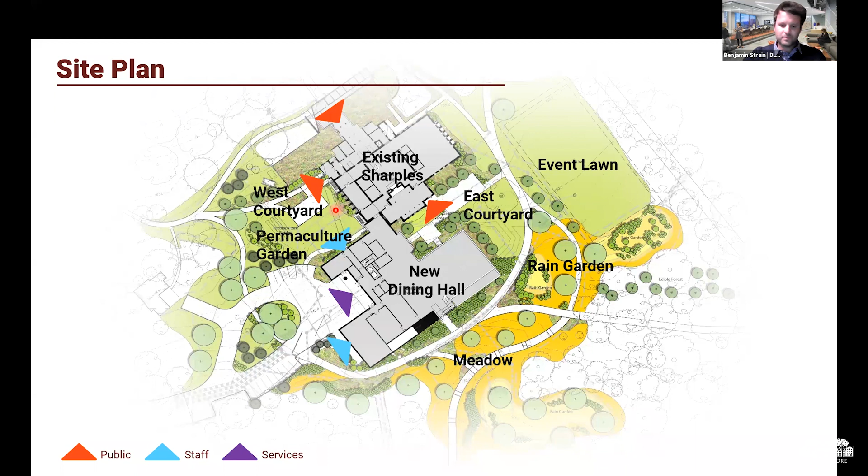So just a quick view from the south, this is the addition, looking back toward the north. Some of the key features: it is a mass timber structure, so very sustainable, a small carbon footprint, as Prem will mention later on. There is a resemblance of campus culture, of stone, of slate tile, and we also see a hint of the photovoltaic solar panels on the roof here. And so again, we're here in the rain gardens, the rich meadows, looking back toward the outdoor dining terrace. So behind the control point, behind the checkpoint for dining, there is outdoor dining now.

And here, again, we're going to populate some current photos of construction every time we share a rendering, so kind of where we are today and where we will be in the future.

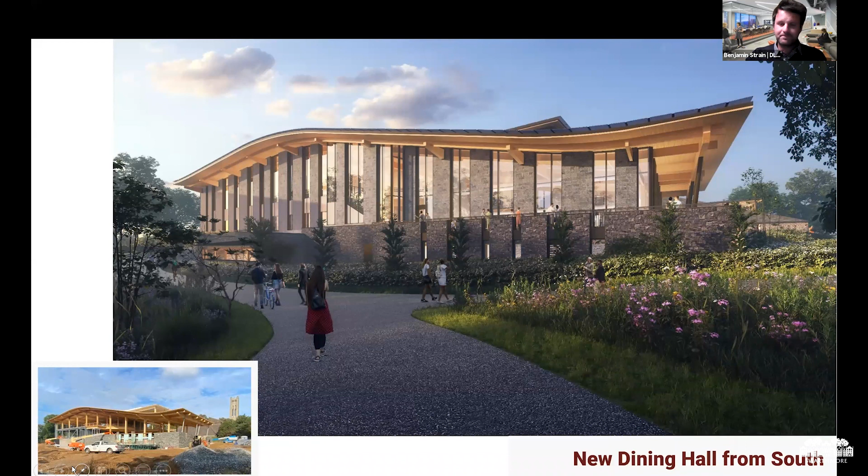Here at the first floor, just helping orientate everyone, in the bottom right corner we have existing Sharples shaded in gray, and the new dining hall here in crimson red. And so again, the kitchen and the dining has all shifted out of, or mostly shifted out of, Sharples that we see here at the top of the screen, and moving into the large, really efficient and beautifully daylit addition here for the dining hall.

Some notable things to move: the Office of Student Engagement is moving from Parrish Hall into what was once the kitchen, and this is a completely reimagined space, new finishes, new opportunities for daylight, really creating that student hub around the student orgs and their lounge space. An additional market cafe really drives success for the student lounge, as well as the rehabilitated fireplace that we see from the historic photo.

Within the dining hall, the new dining hall, there are 10 serving stations or platforms. So it's an all-you-care-to-eat menu, but in more of a retail setting. You can imagine it's not a single line into dining, but past this point you're free to go to the serving station of your choice.

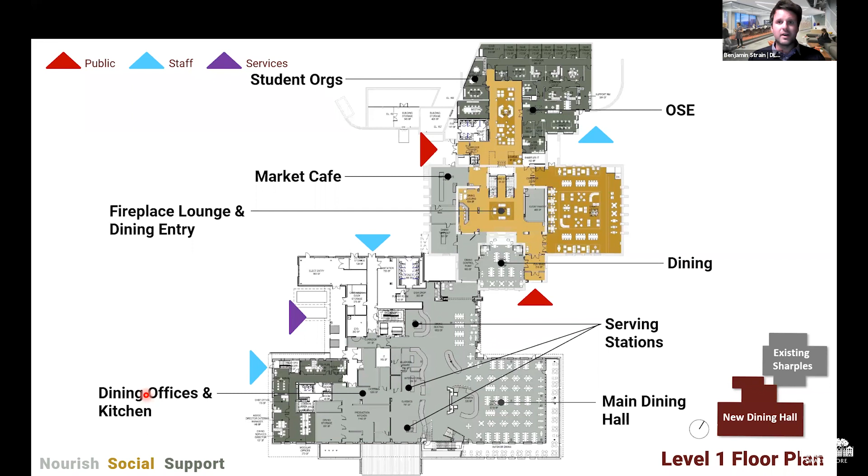You can go to multiple service stations, the salad bar, the grill, the bakery, and really collect what you wish to have for that meal. So it's very interactive. What's wonderful too is the dining staff is out front and center, interacting with the students and visitors to the dining hall. They're no longer tucked behind into the kitchen, but we're really preparing food fresh for everyone at the serving stations. Filling this out, besides the seating and the serving stations, is the reimagined kitchen, getting what was once back of house to front and center, introducing natural daylight and looking at opportunities for natural ventilation for fresh air for the workers.

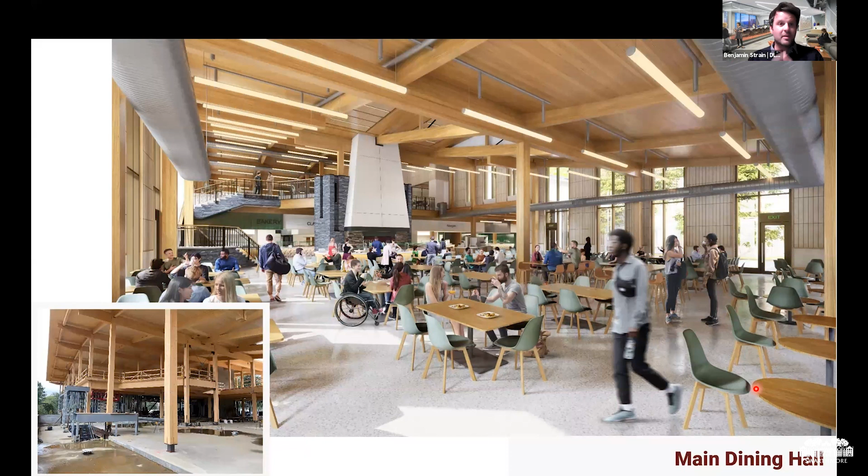Here we're at the corner of the main dining hall, in the southeast corner, looking back toward this large volume of a mass timber structure. It's really a reference to the existing fireplace today, what's known as the hearth. This is the pizza oven, all electric, served here, as well as paninis and other fun interactive stations where the workers are out, the dining staff is there interacting with students, having conversations, really learning more about where their food comes from and how it's prepared.

Again, beautiful daylight, and we'll get into some of the sustainable strategies moving forward. And then bottom left, where we are today in construction, it's really coming alive on campus. I know Susan walks by daily and sends us photos if we're not there, and everyone's just full of smiles. The whole campus is, so it's wonderful to see.

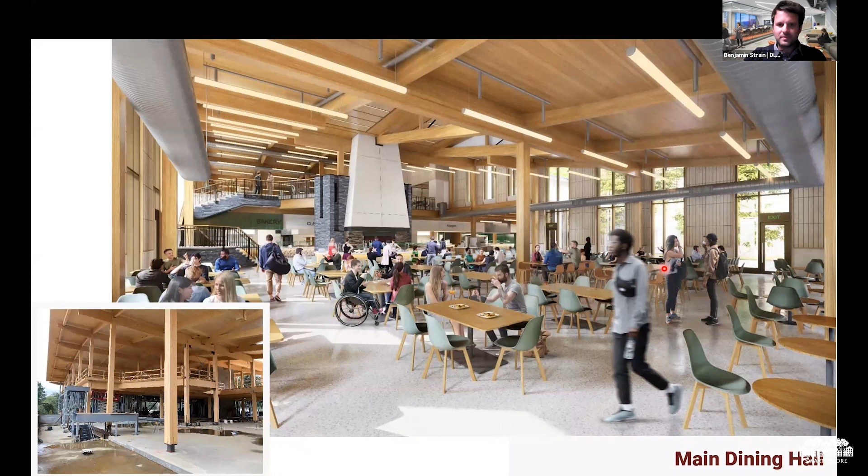And the last here, the Upper Sharples as it is today, again it's been reimagined. We're actually rotating the stair, so it's really a more seamless procession from the north entry that is here today. Instead of the checker stations, you're going to be greeted with the welcome desk. You have opportunities for meeting rooms and more opportunities for student clubs and orgs to meet, really for faculty and staff and students to come together, have that community feel.

And the dining that we see up here today is being converted into a game lounge and then the piano lounge. What's unique about the game lounge is really an opportunity to unplug: backgammon, cards, Dungeons and Dragons, whatever anyone would wish. It was an opportunity for students to say, hey, we're immersed in technology throughout our day, throughout our studies, can we have an opportunity to unplug? So this is a really unique game lounge within the 21st century where we think we want technology, but it's actually an opportunity to unplug, which is really great.

As we saw from the previous rendering, the new dining hall is 2 levels. There is an accessible elevator centrally located, really thinking about how people maneuver through the space, whether at the grand stair or through the elevator. That opens up through what we're calling private dining, but really meeting rooms, so you can come together over lunch and have a student club or a staff meeting, faculty meeting in these private dining rooms. Additional serving stations are upstairs.

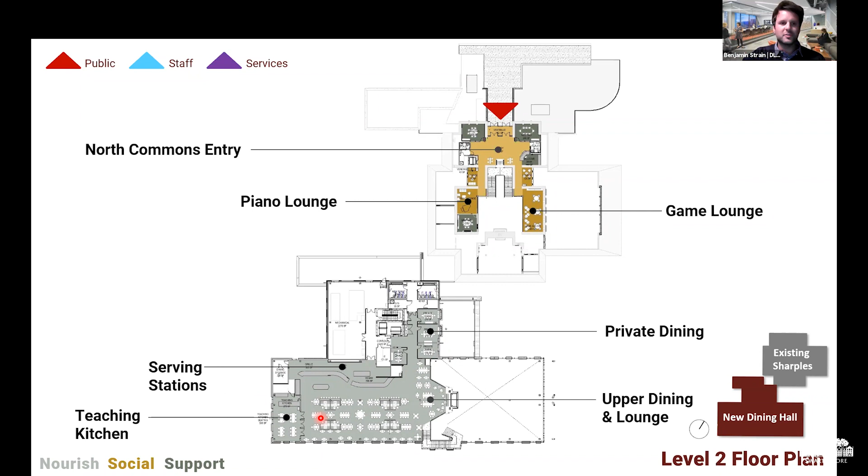We're turning the stair around in the Sharples Lounge. This was once really intended to be a fireplace lounge. Looking back at historic photos, the fireplace is just to our right on the screen. Kling, the original designer of Sharples Hall, really thought about this as a lounge space. So we're reestablishing the lounge, adjacent to the check-in station for dining.

We see in the photos today that we're actually removing the bridge and rotating the stairs. So you come directly from the doors through the Juliet balcony that was once here, then down the stairs into the lounge spaces, into the student clubs, and ultimately into the dining. It's a wonderful space. Renovation starts approximately a year from now, so we'll see some big changes coming soon.

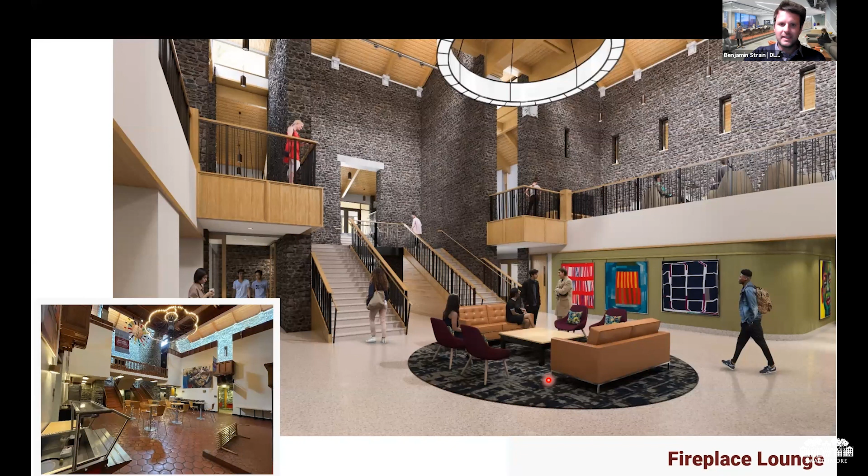With that, Prem, we need to jump into some sustainability, and I'll pick up instruction at the end. Absolutely, thanks Benjamin. Can you hear me okay?

I want to frame this conversation about sustainability, which is really important, as Benjamin mentioned during the visioning sessions, as a core criteria for success. Swarthmore has a very robust environmental framework, and most of you are probably familiar with that. This Dining and Community Commons project exceeded every aspect of the Swarthmore environmental framework and then more.

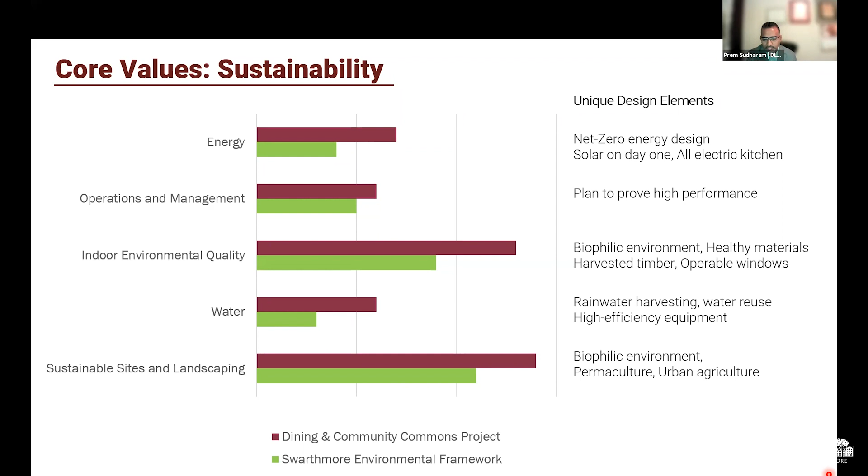I'm going to talk to you about the journey that we went through. As Susan mentioned, we started in 2018. However, the journey will continue for a very long time to get to our final success metrics in terms of sustainability, all the way through 2025. I'll walk you through briefly the engagement sessions that we had in the beginning that led us to where we are today in construction.

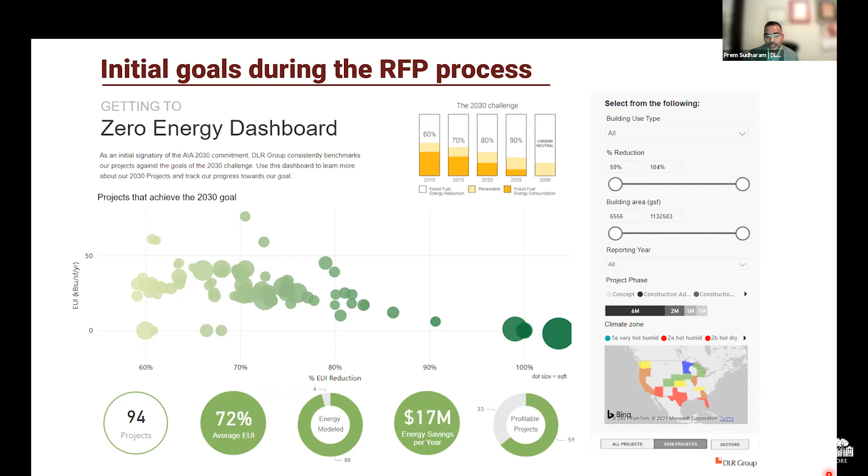In the initial RFP process, when Swarthmore College was looking for an architecture firm to design this facility, they had a requirement that this building should be a zero net energy building. This is above and beyond what the Swarthmore Environmental Framework has already put in place. So we demonstrated our experience as DLR Group designing net zero energy buildings.

We had three questions that we wanted to solve before we began design. The first question was, what does really getting to zero mean to Swarthmore College, and how does that relate to Swarthmore College's values? And finally, how do we measure success? These were fundamental questions that drove our design from the beginning.

At the same time, when we started, we also realized that our college was going through what is called the Road to Zero map, which is a carbon neutral plan that the college is developing to achieve carbon neutrality by 2035. So we wanted to understand how the Dining and Community Commons project plays a role in this key plan that the college is developing towards carbon neutrality. I'll talk about how that comes together.

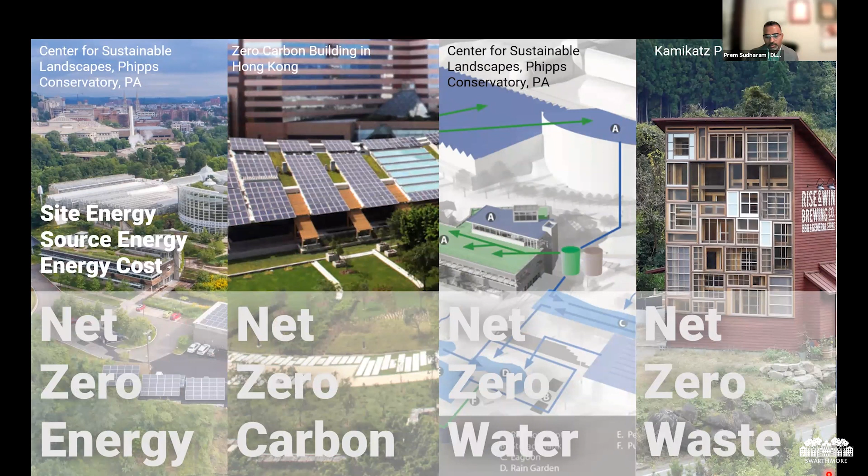One of the first things that we wanted to explore was, what is net zero? There are lots of nuances to this idea and definition of net zero, from energy, and you probably all have heard from the COP26 conversations, carbon is a very important topic. So we discussed what net zero carbon is, but also net zero water and net zero waste. It's important that we discuss all these different nuances so we know exactly what is the goal that we're going after, and also what is the goal that we're not going after.

We also talked about the context of what is net zero. When you take carbon footprint, we can go all the way from construction to operations, to the materials that are used in construction, as well as transportation and so on, all the way down to the food that's served on campus, what carbon footprint does that have? So we explored all these different options to really understand what it is that we are going after.

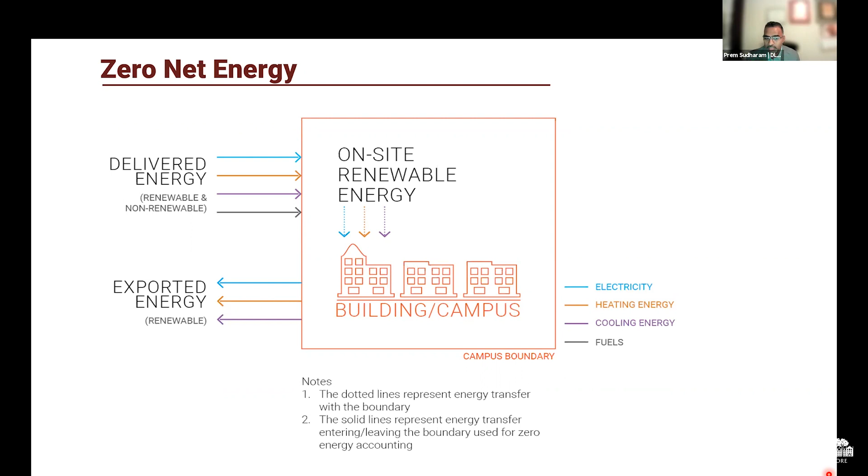At this point, I want to clarify the term zero net energy. Imagine drawing a boundary around this building, and think of the amount of energy that is being generated on this facility over the course of a year. If the building operates within that budget of the amount of energy that is generated on the facility, then that building will be considered a zero net energy building. This was our criteria going into design.

We also wanted to explore, as some of you mentioned, the quality of the food served in the dining facility. We wanted to truly understand, how does dining relate to sustainability? How does food relate to sustainability and wellness?

So this was one of the exercises in the engagement sessions we had, where we asked dining staff, students and faculty how they see the connections between ingredients and the people who serve food, the people who are receiving the food at the dining facility, and the building itself, and how that's connected to the campus in terms of bringing awareness towards healthy food, and how this all relates to the regional and global impact of where Swarthmore is. This was one of the most interesting sessions we had, because we discovered so much.

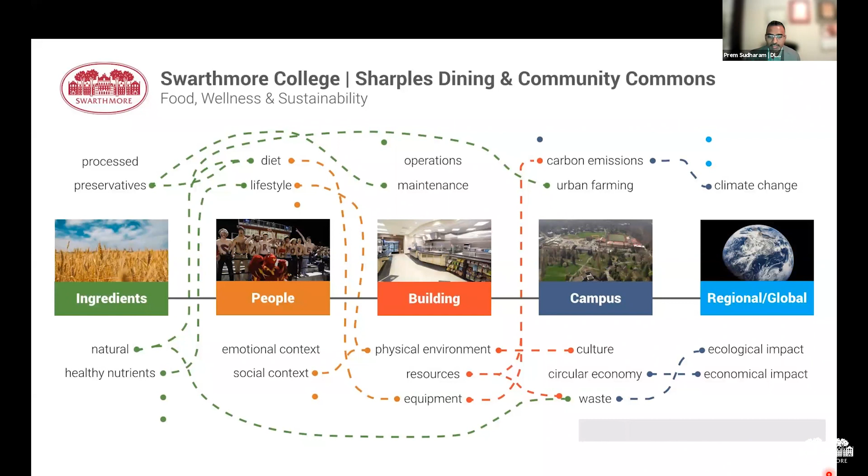This led to amazing goals that we identified very early in the design, before we ever started. I'll highlight a few of them.

From a dining staff standpoint, they were excited about how they can change the culture to one of yes in lieu of we can't. One goal they identified was that currently 45% of produce is locally sourced, and they want to achieve 80% in one year. They also have a goal of a 40% plant-based menu as this progresses, which are amazing design goals that change how and what we procure in terms of equipment for the kitchen facility.

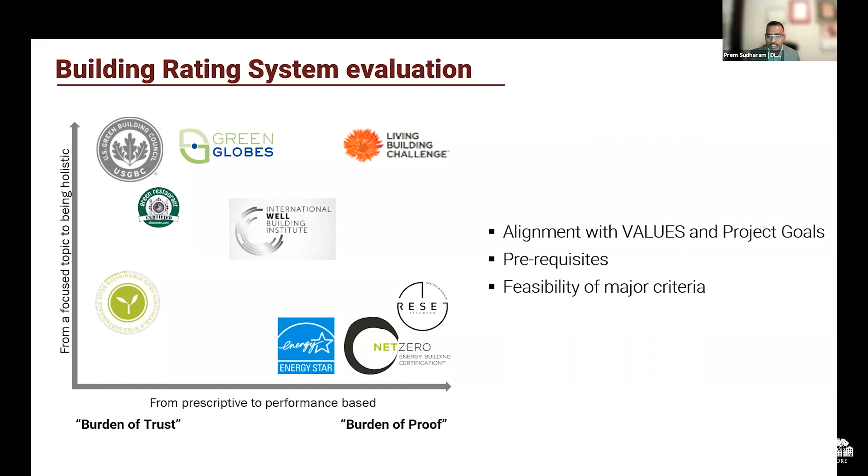Within the Swarthmore environmental framework, there are some gaps. We also identified other green building rating systems with similar gaps, but the only rating system that aligned with Swarthmore's values for this project was the Living Building Challenge. So that became the measure of success.

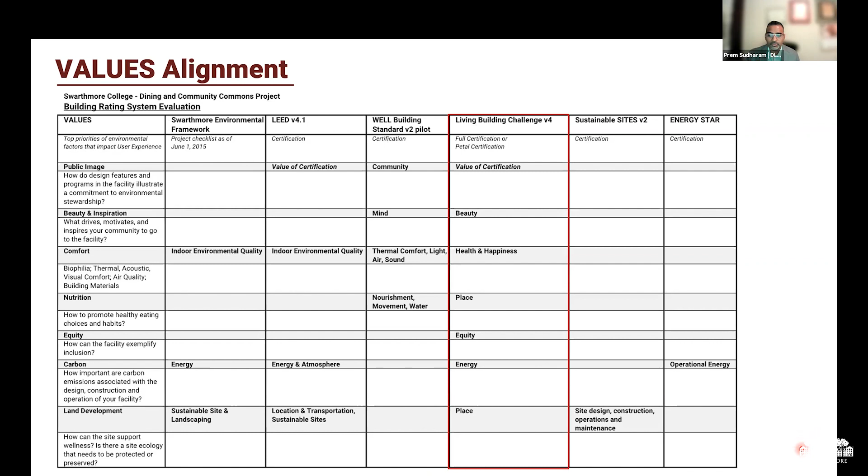So we began to pursue the Living Building Challenge. One key criterion reinforces that this green building rating system is on the burden of proof side of the equation—we have to show in real life that this building performs as a net zero energy building. It's a very challenging green building rating system to achieve.

To give a comparison, there are several hundred thousand LEED buildings in the world, but less than five to six dozen Living Building Challenge projects in the whole world, because it is very difficult to achieve. The Swarthmore community chose to pursue this challenge.

One key aspect of this challenge was to explore biophilia, this idea of love of nature. We're in this beautiful setting in the Arboretum, so we took a whole group of people and explored what it really means to be biophilic, and how the Swarthmore campus can inspire this design.

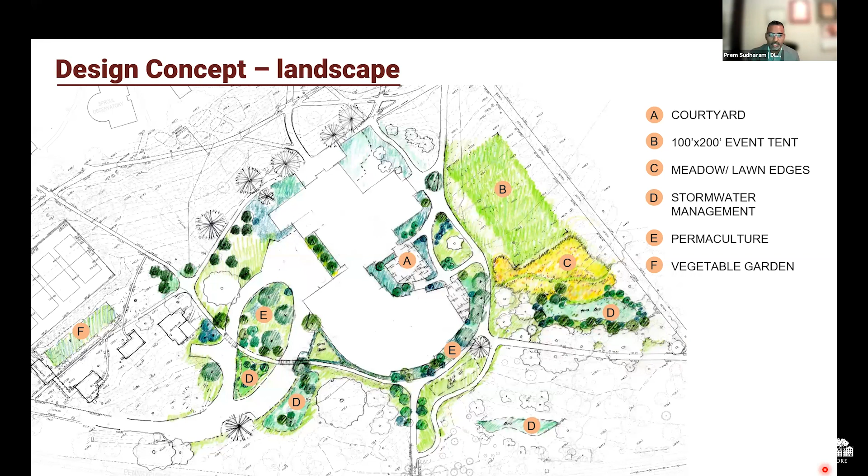There's a vegetable garden, permaculture, which is the growing trend in agriculture. So there will be plenty of opportunities to learn permaculture. And when it's all said and done, over 60% of the landscape palette on this site is either directly edible or used for some kind of purpose for humans, other than being just ornamental. That is an amazing shift from where we started, because of the engagement we had with all of the Swarthmore community.

Specifically to achieving the zero net energy goal—the amount of energy you produce on site should be above or equal to the amount of energy you consume over the course of the year—we developed an approach of top-down and bottom-up, looking at the carrying capacity of the site: can the site carry X amount of building? And then from the bottom, what do we really need? One thing we realized through this approach is we actually right-sized the program, reducing the square footage required to satisfy both community commons and dining needs. That helped tremendously in getting to our zero net energy goal.

One key thing I want to identify here is two things. One is electrification. What we realized was dining facilities are a very energy-intensive building type, and the biggest energy use in a dining facility goes towards the kitchen and its equipment. So to achieve the zero net energy goal and the criteria we set during the early design process, it needed to be an all-electric kitchen.

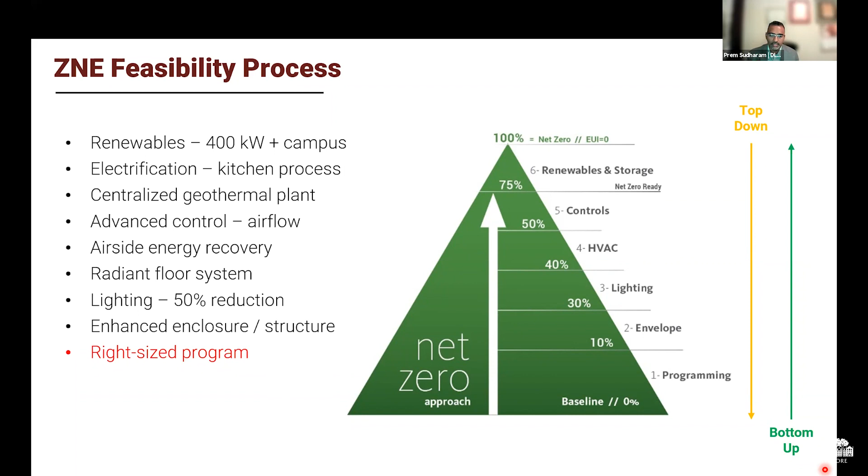The geothermal plant is basically a system that allows us to take the heat from the building and store it underground through a series of pipes. Then when we need that heat back again, we can take it back from the earth. This is a very effective renewable source of energy that doesn't require any fossil fuels to operate. That is another key design aspect that will help us get to zero net energy, and I'll talk more about how this project provides a space for that geothermal plant.

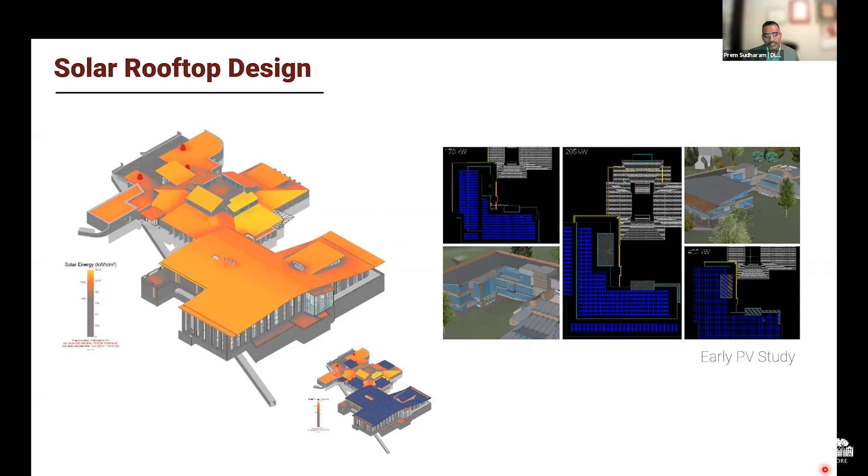As I mentioned, there are a number of energy saving solutions that we have. One that is significant is demand control ventilation and radiant flooring. We also included another key aspect the college has called carbon shadow price, which assigns a certain amount of carbon, or a certain price, per metric ton of carbon. That was influential in deciding what design strategies will get us to zero net energy.

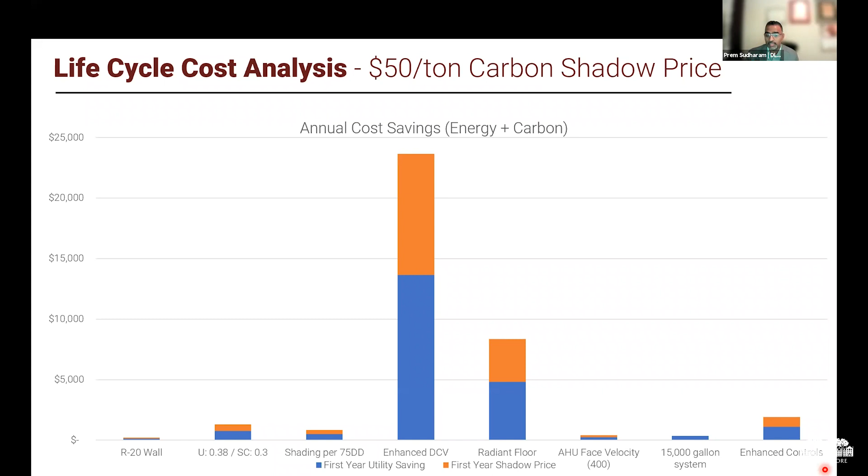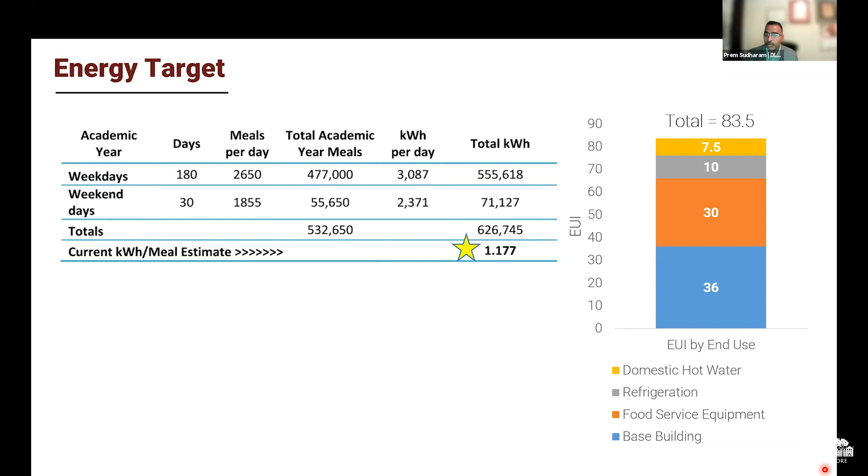So this is where we ended up. The chart on the right shows the amount of energy this building will consume, expressed as energy use intensity, 83 units of energy per square foot. The middle portion, 30 units, goes entirely toward the kitchen. The solar production on top of the new building, which covers the entire roof, will produce the equivalent of 30 units. So the entire kitchen will be completely zero net energy, offset by the solar system. The rest of the energy comes from the campus solar being developed as part of the carbon neutral plan. That's how we get to zero energy.

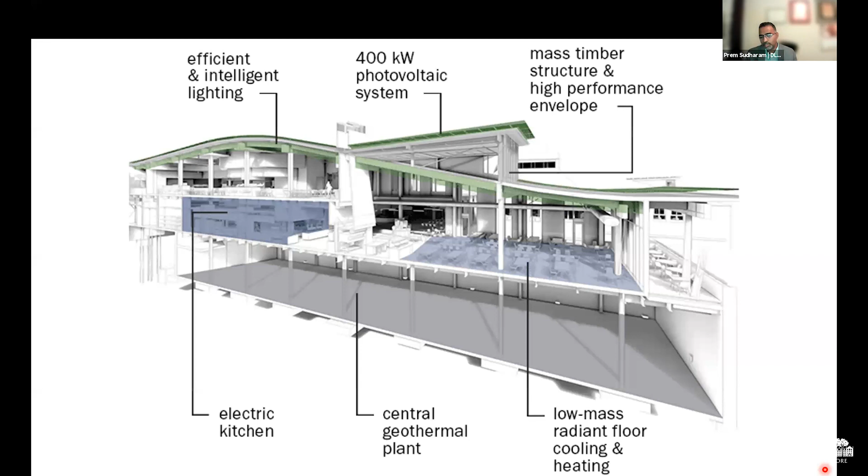This diagram shows that the basement of this new facility will host the central geothermal plant for the entire campus. Pushing water into the ground and pulling it back up requires a significant amount of pumping equipment, so that's what that space is for.

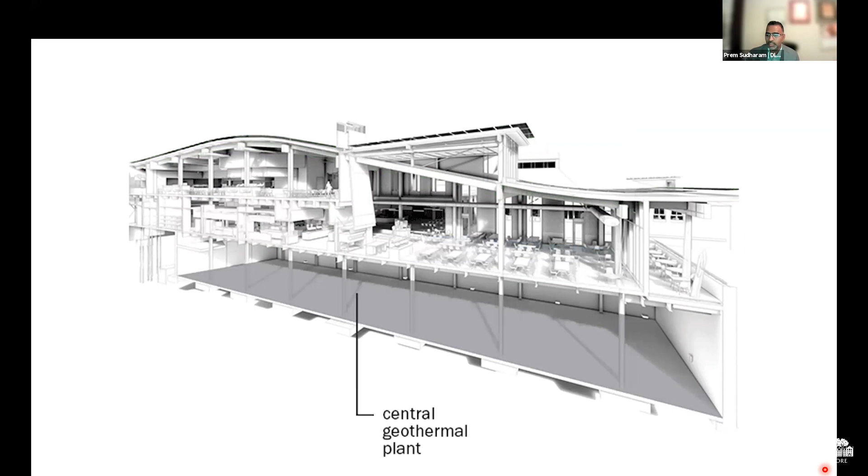There's an electric kitchen, efficient use of lighting, and 400 kilowatts of solar panels on top of the roof. Just to give a comparison, a typical home has 10 kilowatts of solar system, so this is 40 times that.

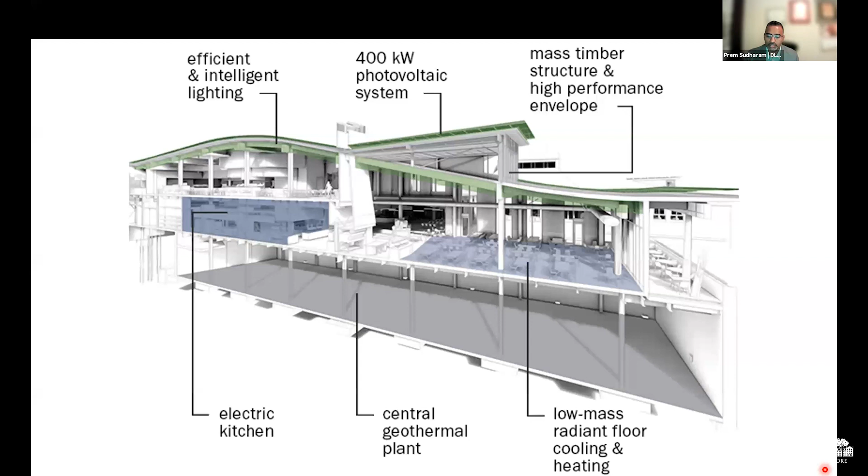Comfort is again super important, as you saw in the values identified. To achieve comfort, not only thermally but acoustically, there are lots of design features in place that were informed by the biophilic design summit we had, and inspired by the Arboretum. Benjamin will walk through some of that in the next few slides. But this, in a nutshell, is how we get to zero net energy.

Lastly, you can click through a number of slides here, Benjamin. This is the Living Building Challenge I mentioned before, one of the toughest things to achieve, and we are pursuing 5 out of 7 petals within the Living Building Challenge. That doesn't mean we're not pursuing the other two, we're just not achieving certain aspects of those requirements in terms of water and materials. I can go into more detail if you have questions during Q&A.

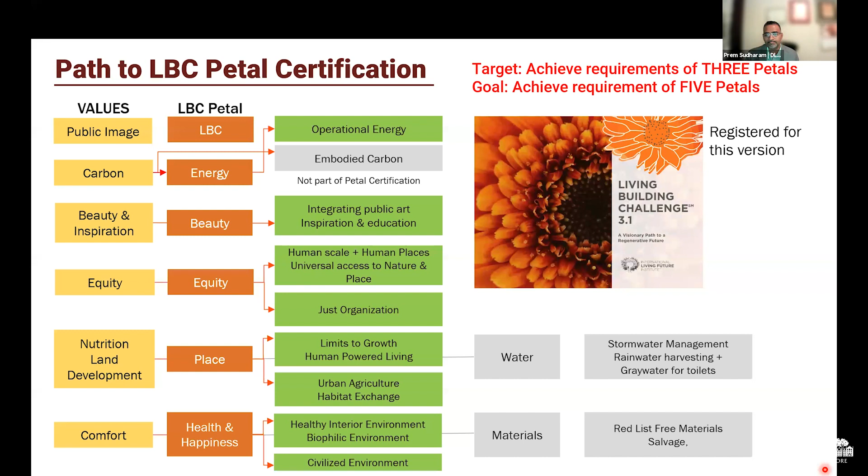So lastly, we are in construction right now, and in 2022 the new building will be done. Then in 2023, the renovation of the existing Sharples will happen. As I mentioned before, the Living Building Challenge requires us to show proof that the building actually performs to the design goals, so that will happen in 2024. We hope to achieve this certification in 2025.

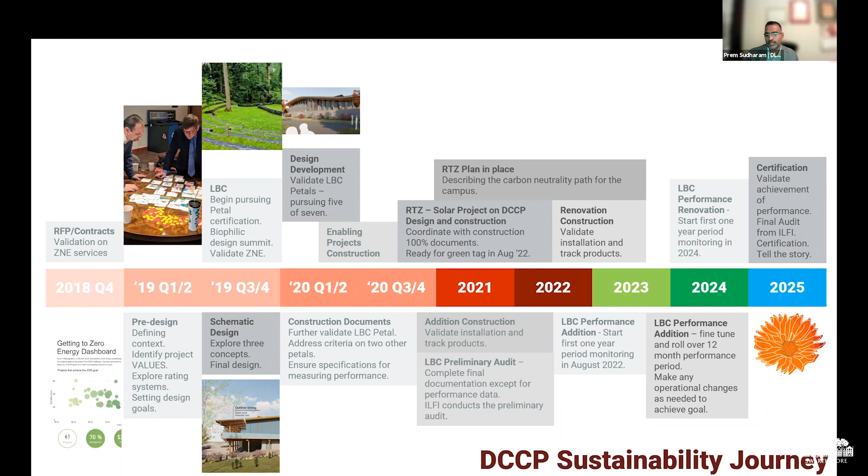All right, thank you, Prem.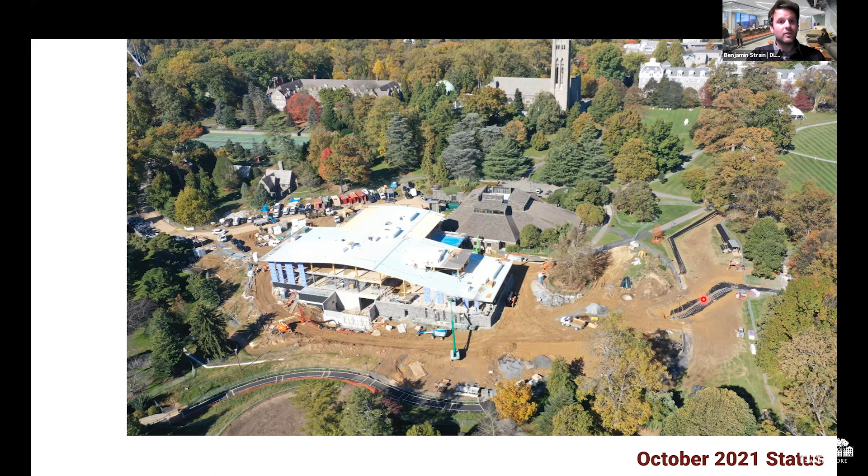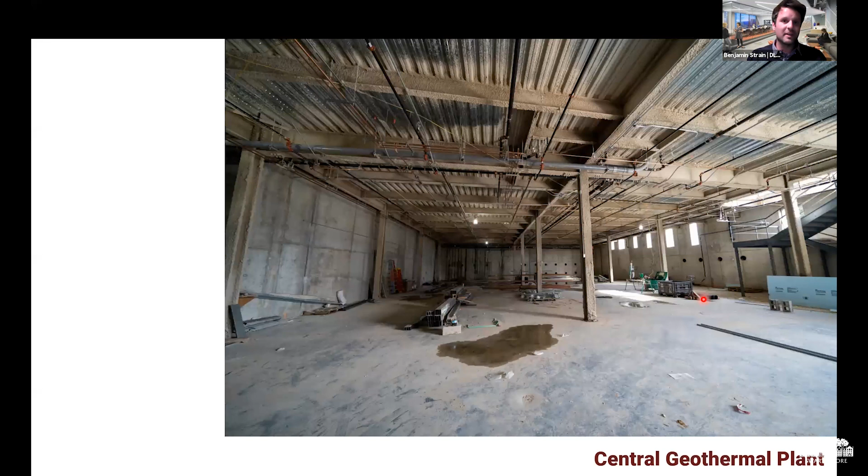So again, that geothermal plant sits under our dining hall. This is a large shell space today as the college pursues carbon neutrality here in the next few years. The building blocks are there, and we're excited to be a part of it. It did help impact some of our decisions as well, pushing us toward those synergies with how we use low temp heat versus steam, and some of those decisions early on. So really great synergies with that project.

Again, this is a view from Magill Walk, at the end state. We did look for opportunities to introduce natural light into the existing Sharples as well. You'll see on the right side here, this is a new dormer. It also begins to marry some of the architectural language we see here, that post-modern style, into that modern 21st century look. So it's a great juxtaposition of some of the rectilinear into the curvilinear that we see in the form today.

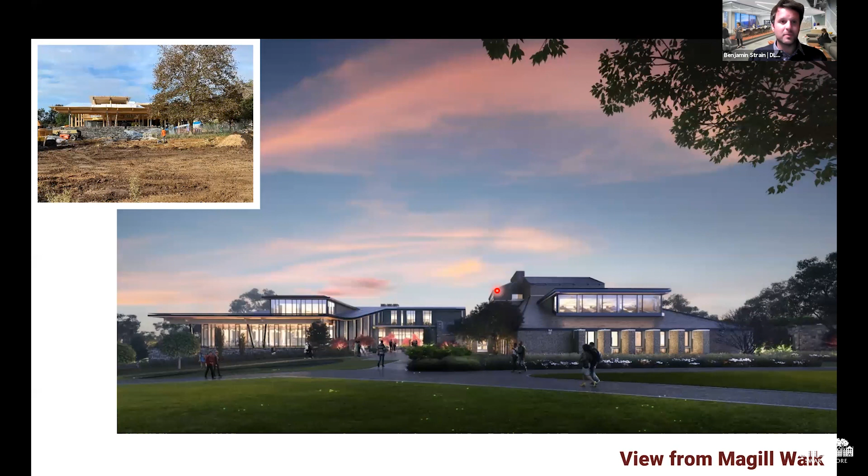And again, this is that east courtyard. This is the south door of Sharples today, primarily used with limited access. There is a control point there, but again, this is a reimagined courtyard.

You can grab a clamshell from, or perhaps from the Market Cafe, and come outside and really enjoy that. This could be a pre-function space too, as events are taken on the east lawn here. Again, we see that rich tile of slate, the historic stone, and then that rich glazing coming through underneath the mass timber here.

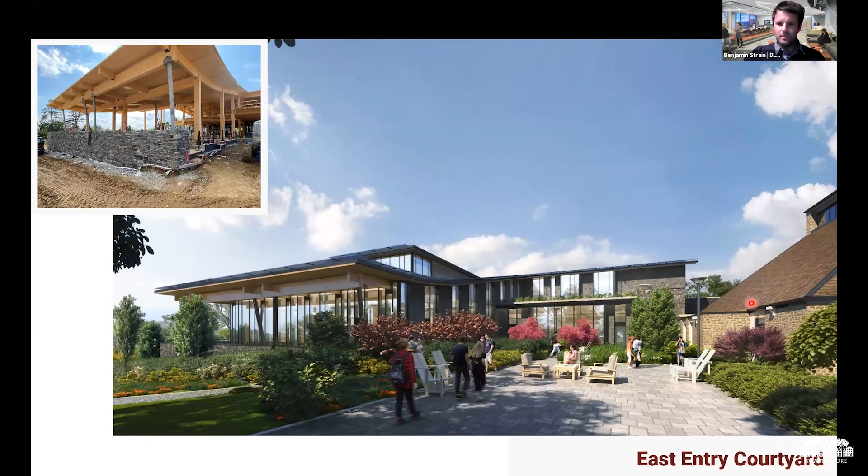This is the new serving stations, as we mentioned, really again all you care to eat, as well as trying to erode some of those lines, really offer all options to students. Grab a plate and have a salad, sit back down, come up, grab another plate, at the allergen aware area perhaps. So really trying to think of this as a service-first model here.

Again, we see the dining staff out and about having those conversations, really educating the students and visitors about the food.

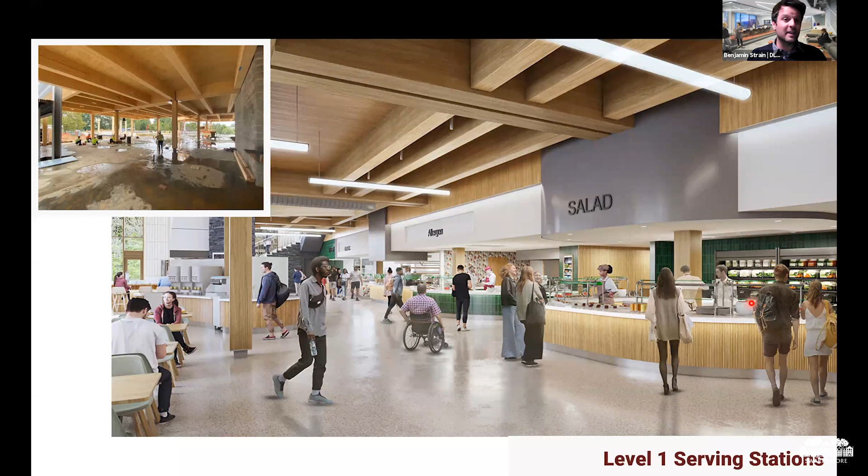All the materials are very natural. We are pursuing red list free where we can, thinking about the chemicals that go into the production of materials and what that does for the indoor air quality and the air environment.

In the new dining, we're targeting over 800 seats within the new dining facility, and currently Sharples is just around that 550 mark. So really thinking about the future growth of the campus and some of those opportunities to have a variety of seating and different seating styles to really suit the needs of all. Some like to gather large groups, some like to have that heads-down time and still work through and study through their mealtime.

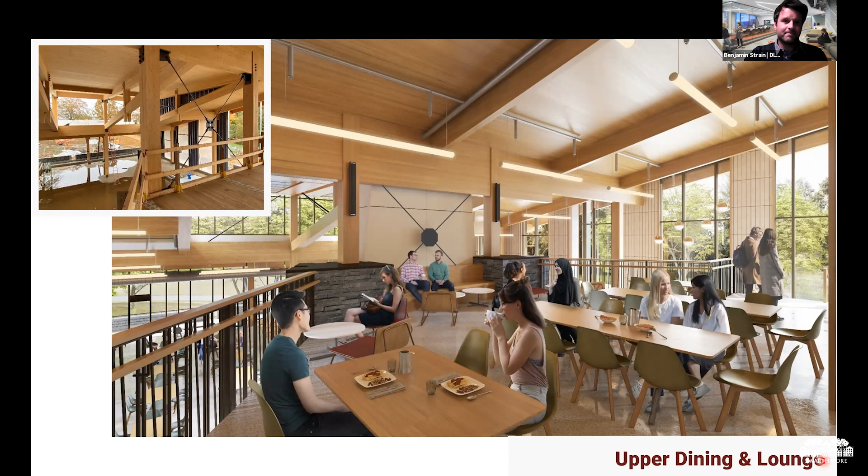This is just another quick view of the additional stations up on the upper level, additional salad bar next to the grill. Again, a variety of seating, rich materials, thinking about those acoustics as well and active control of the lighting. We love the photo up in the upper left, just to get that sense of scale, that sense of volume that's going to be coming through when you're underneath the mass timber, and those views out that we'll see.

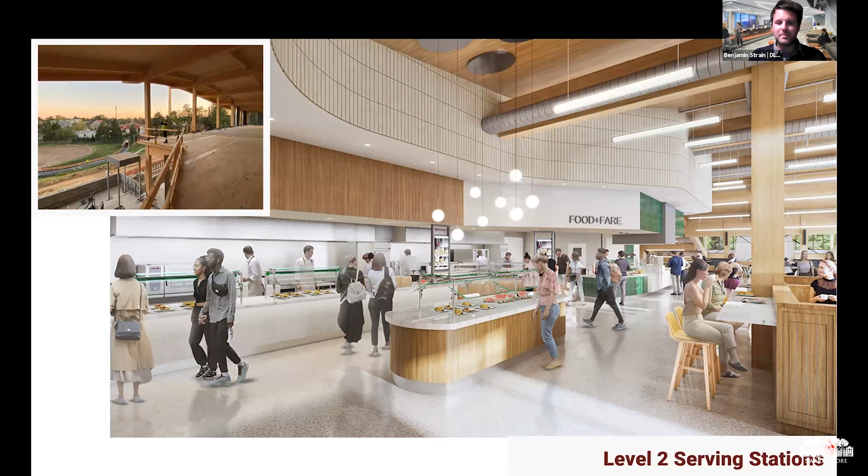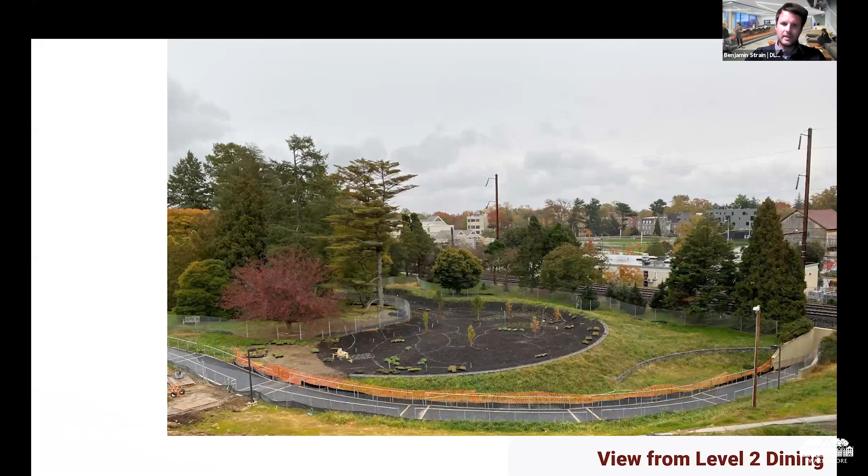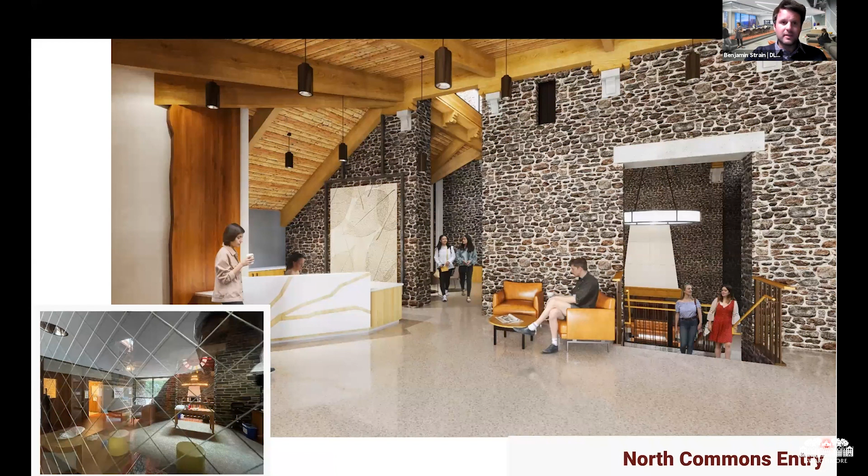And what's great here too, just to point out, is the reclaimed wood. Some of the donor signage, some of these elements that we see to the left, is part of the reclaimed wood. So the history of the tree lives on - if it did have to give its life for this project to expand, we're celebrating that in memory of. There are going to be moments throughout the project that really touch back to the existing conditions and celebrate the beauty of the wood.

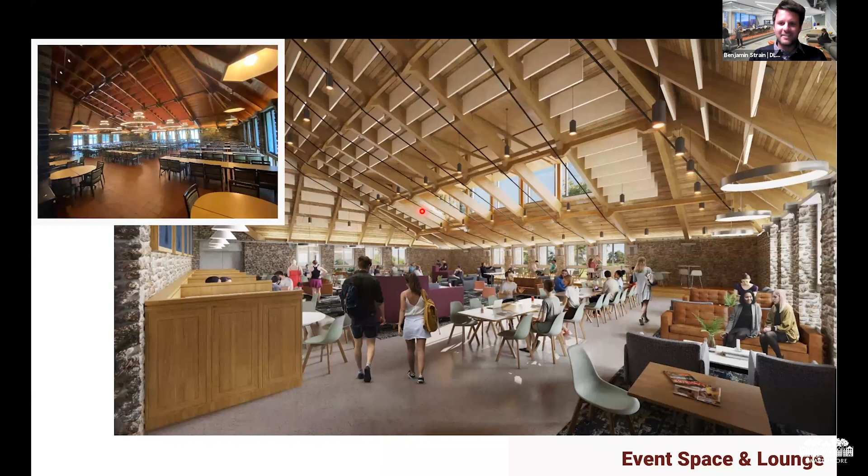That's excellent. So I'm going to throw out a few questions that we've had come in over the course of the presentation. We've answered a few, but I think these are ones that are beyond me and Anthony. One of them is about the noise level. A couple people have said the noise in Sharples is bad now, and they're hoping it won't be like that in the new space. Can you talk a little bit about acoustic mitigation?

Yep, certainly. And that was something we did hear through our engagement process. We do look at that with our in-house acousticians. In the addition, as well as existing Sharples, there is acoustic treatment on the walls, on the ceilings. We're also looking for that absorption within some of the furnishings as well. So it is a very hard place in Sharples now with the stone and the tile floors. And so the introduction of the acoustic ceiling panels, baffles, as well as the changing of furniture.